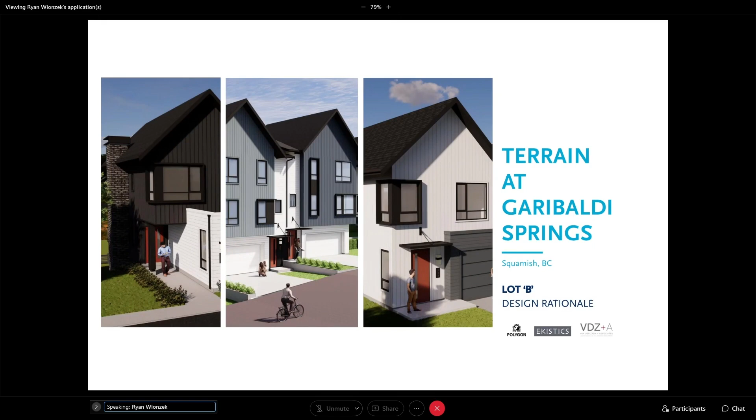So this is Garibaldi Springs Lot B, or what we're calling Terrain. This is the second phase of development at Garibaldi Springs. So a quick rundown of our vision: we are taking our cues from Scandinavian architecture as it relates to our styling and character.

We're looking to provide a number of housing options across the site of various sizes to create community that all could live at. We are looking to develop a continuous public and private multi-use pathway system that connects down from Dowad and across through all of these sites and into the adjacent park areas. And we're looking to incorporate a number of sustainable measures across the development, including meeting Step Code 4, as Kevin said, and providing EV charging to all homes.

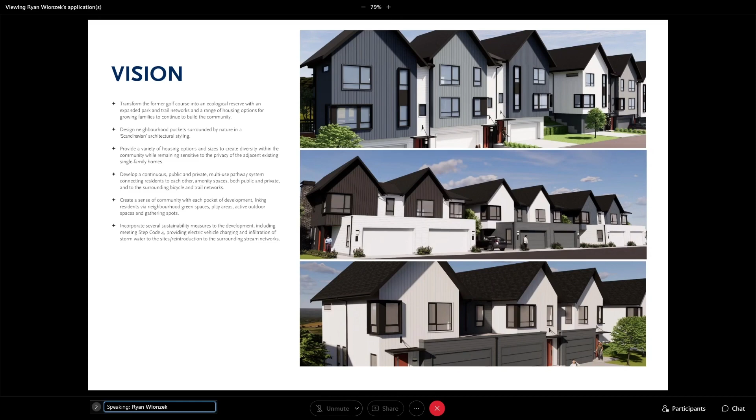As I noted, the architectural influences come from the surrounding areas, but we put a contemporary twist on it. We're taking our cues from Scandinavian architecture, focusing on simple, clean lines, distinct gable forms paired with contemporary window forms and groupings, really giving the development a unique character. Fiber cement vertical siding, along with a crisp, clean color palette, horizontal plank and select brick elements, metal shadow boxes and canopies help the exciting architectural character that Squamish is known for.

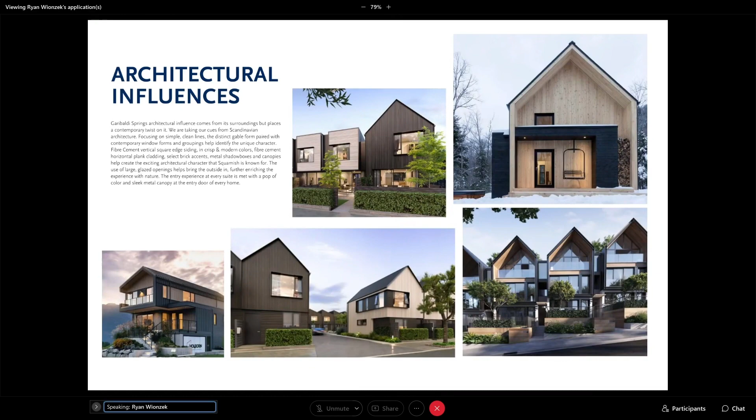The use of large glazed openings helps bring the outside in, which is a key feature of the Squamish area. As you can see here, here's some of the materials and ideas for detailing that we've taken into consideration.

So here is the proposed color palette. We've got 3 color schemes that we've applied across the site. Our vertical siding tends to be applied to our key massing elements, so the gable forms. Our horizontal siding has been applied to the base of the building, grounding the buildings. Again, the color schemes are quite crisp and clean, which we're quite excited about.

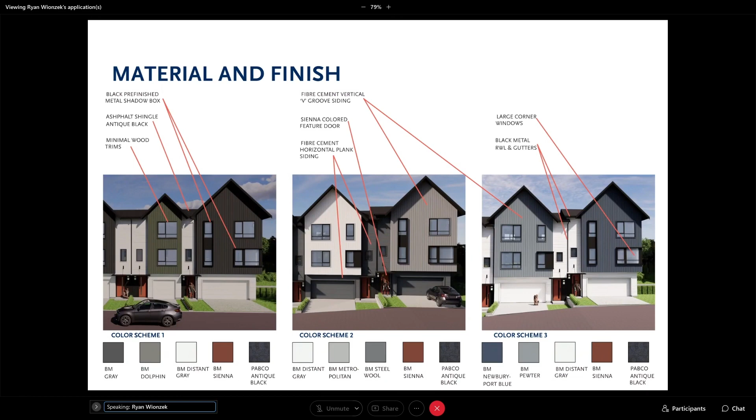A high-level look at the site plan here. As Kevin noted, we've got 127 homes of varying size across the site, including affordable homes and lock-offs. We have 10 affordable homes, 17 lock-offs have been provided. We have approximately a 40-meter grade change from top to bottom.

So we've oriented the buildings to follow the natural topography, and we're using the building foundations in combination with retaining walls to make up that grade change. A large outdoor amenity space has been provided at the lower end of the site, which Travis will get into shortly.

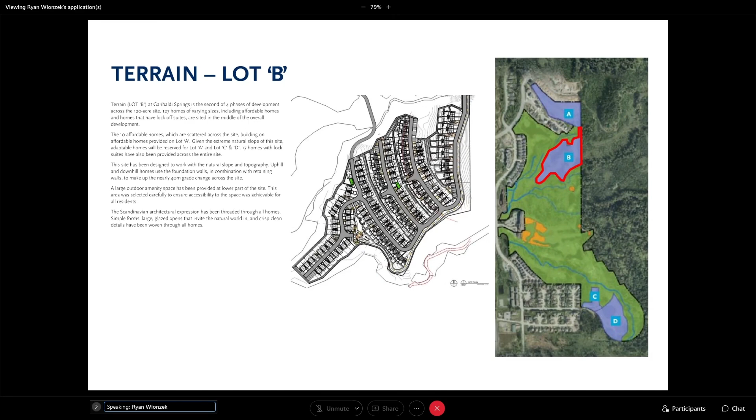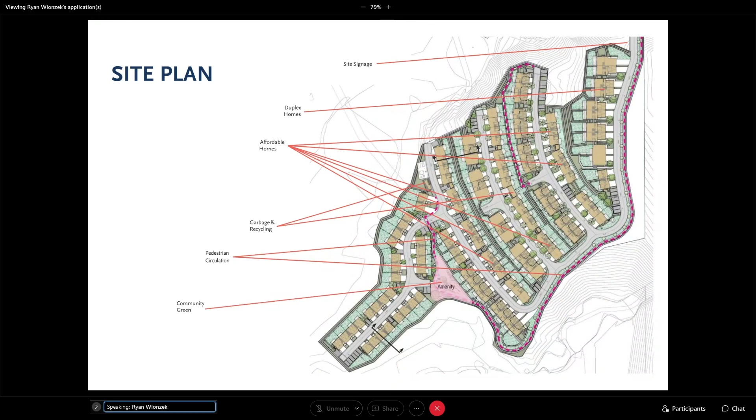Again, just a high-level look at the site plan here. At the top of the site, we've got our grouping of duplex homes. The affordable homes have been distributed across the site, so they're not all grouped in one area. As noted by Jesse, we have 2 garbage and recycling holding areas across the site for access for the residents, and then our amenity space on the lower bench of the site.

I'll hand it over to Travis quickly to go through the landscape elements. Thank you, Ryan. Ryan already gave a comprehensive overview of the site, so I'll focus on a few of the elements that impact the landscape experience.

One major element is the walking path that was mentioned. That's dashed in pink on this plan, and it reaches down from the north, down the south, and up through the center of the amenity space. As well, we also have a walking path linking to the lock-off units, and that's the one in the center of the project there behind those townhomes.

Secondly, significant time was spent honing the terracing of the site, so that, as Ryan mentioned, we are following that natural topography and creating yards with pleasant outdoor spaces across the hill slope area. So while much of the character of the site comes from the architecture and the surrounding natural spaces, the landscape seeks to accentuate access to nature and local vernacular with the use of site-quarried stone when possible.

The images below in this slide show stacked stone walls that will terrace the site, as well as attractive privacy and yard fencing. Where possible, transparent fencing will help the rear yards connect to the surrounding natural lands. This is particularly notable along the south and southwest rear yards on this project, that sort of south peninsula-looking element where we're really directly adjacent to a lot of forested area.

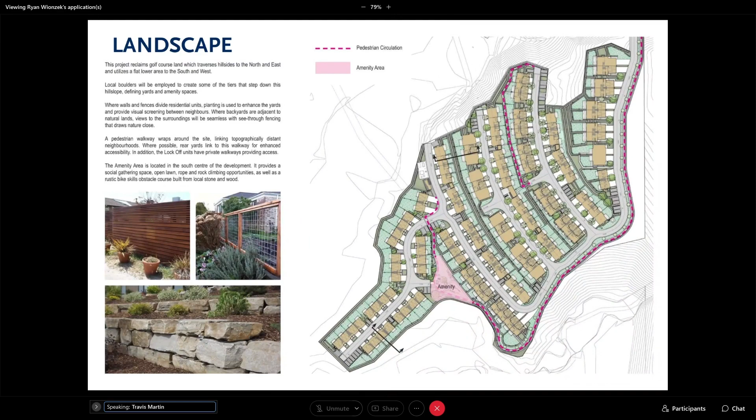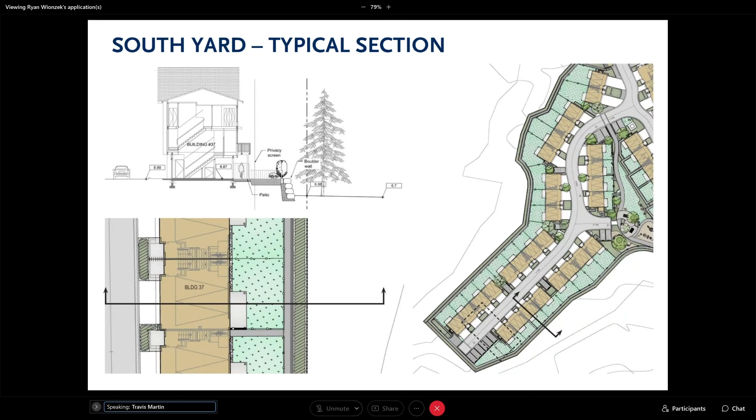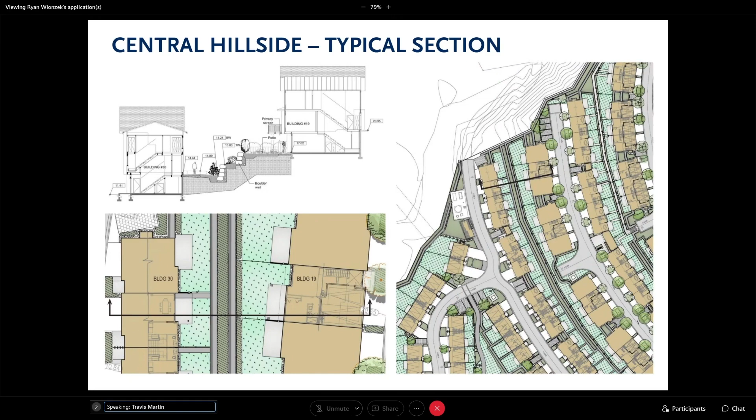And then here's one of our more complex sections along the hillside, which maximizes yard space, provides a vegetated screen on the top yard to help reduce overlook, and then provides vegetation along the wall bases to provide year-round green views for that lower unit looking into the backyard. And we've got generous sized patios and lawn space to the back.

Looking into the planting, as noted, the site comes with a few challenges: being fire smart and being bear aware. Our design seeks to provide strong evergreen presence while respecting fire smart guidelines, which minimize conifers since they're more flammable. We're also being bear aware while using interesting native species not always used in development, as well as a mix of pollinators and color. For trees, we're mostly deciduous, mostly smaller flowering and ornamental trees, plus some shade trees in the mix.

Finally, on this lower amenity area, it's well linked to the perimeter walking path. There's a lower nature area to the southeast, so you can look beyond, and it's a longer space, which helps make it feel larger than it actually is, but it's a good size. We focused on the center with a nice seating area with a few picnic tables and a gathering space. Beyond that, there's an open lawn, some natural play including a large boulder and ropes. We're hoping to get those boulders from the site if possible, as well as a boulder log obstacle course to the right and a seating circle to the south.

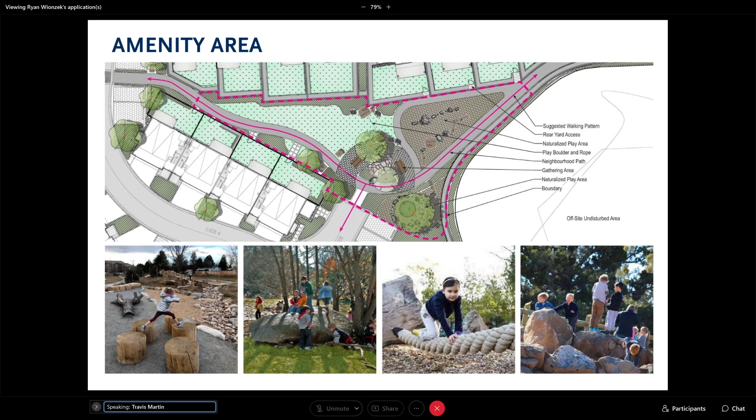Okay, thank you. Getting into the character and the unit types more specifically, what you're seeing here are A homes, or the affordable homes. As Kevin noted, we have 10 of these homes across the site: 6 three-bedrooms and 4 two-bedrooms, approximately 1,000 square feet. Each home has 2 parking stalls, one in and one either on the driveway apron or a remote location nearby. These homes are designated as affordable without sparing any detailing or expense, so they look and have been designed to look like all the other units.

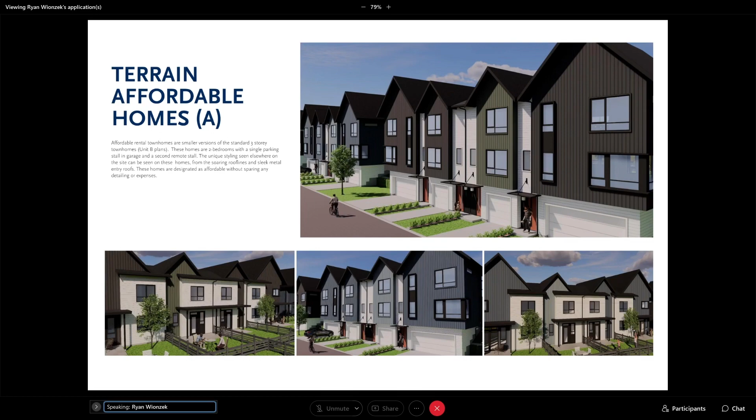The B homes are our most common unit across the site. We have 36 uphill versions of these homes and 35 three-story versions down on the lower bench. The approximate size of these homes is approximately 1,500 square feet, typically 3-bedroom homes.

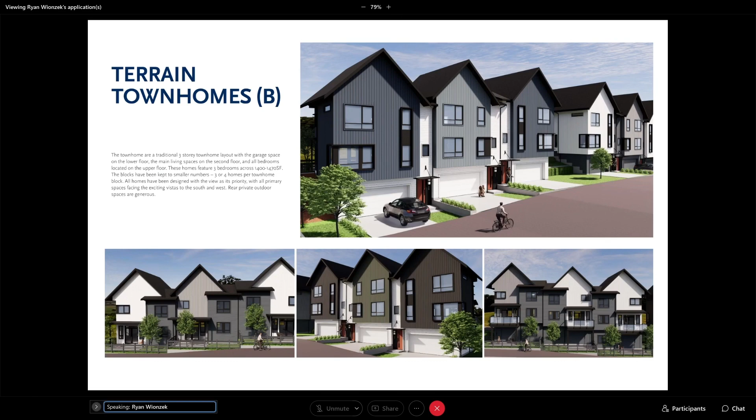Our C homes are downhill homes, and we have 38 of these, 19 of which have lock-off suites on the lower level. The non-lock-off would be a 4-bedroom, 3-level home. The lock-off versions have a 1-bedroom suite on the lower level, and the main suite is a 3-bedroom, 2-level home, approximately 2,150 square feet. Again, these lock-off homes have been scattered across the site at various locations.

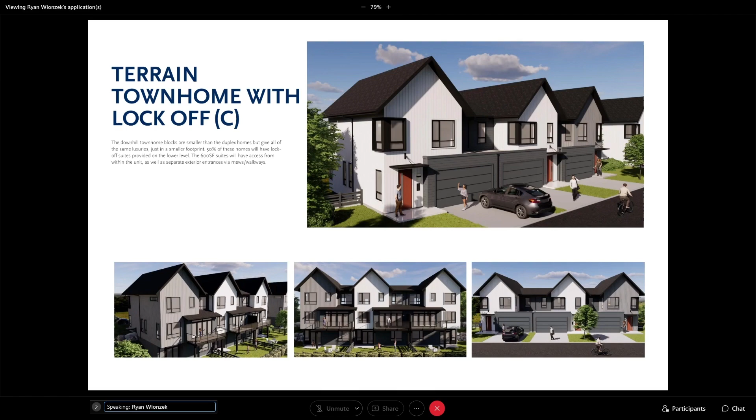The D homes are our duplex homes that you will see when you enter the site, coming down from Dowd and through the Highline property. We have 8 of these homes on the site at approximately 2,600 square feet, 3 bedrooms plus a large walkout basement.

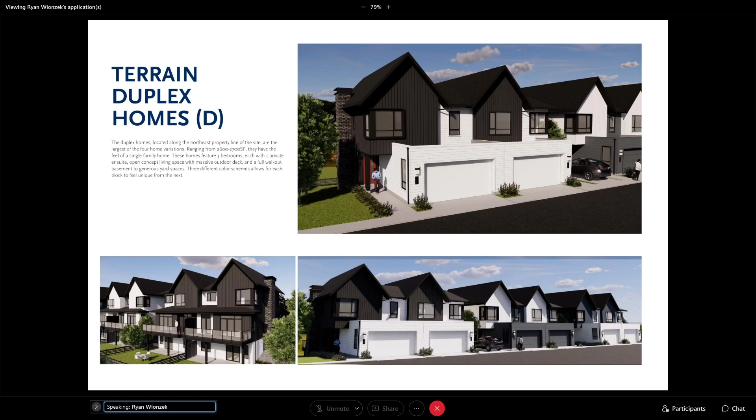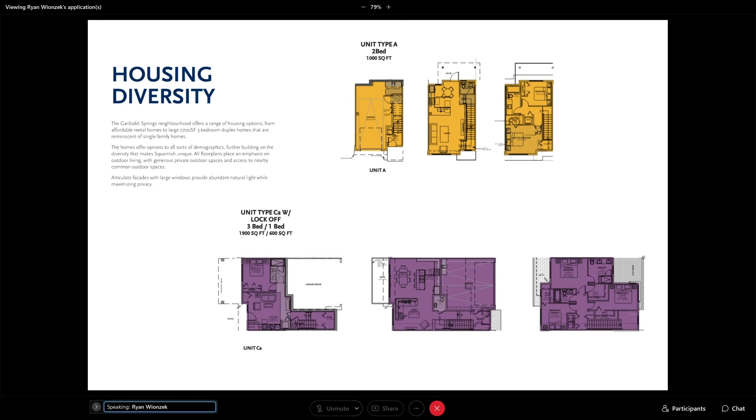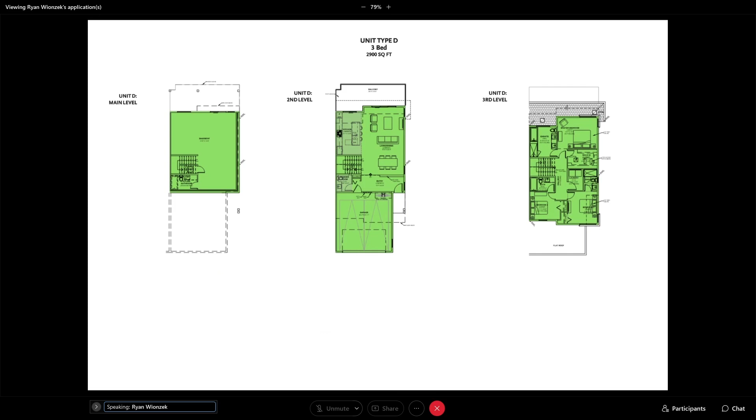And our duplex home, again, that you'll see at the beginning of the site. Each bedroom has its own ensuite, so quite a nice home, almost single family home-ish. Just another version of that plan.

Just a quick site section to demonstrate how we're working with the natural grades across the site, and to show the challenges we had while grading the site, it being quite a steep site.

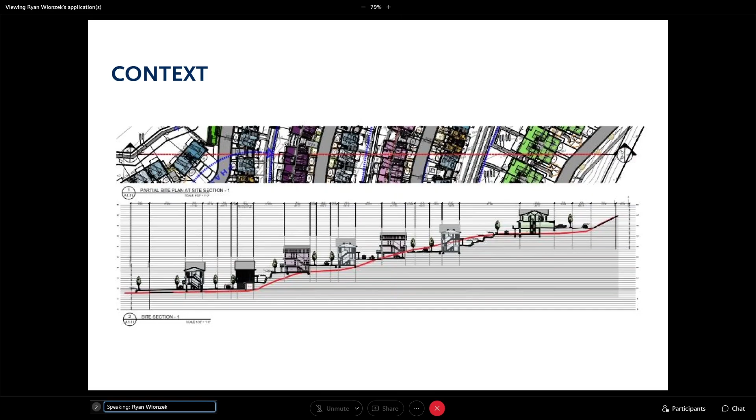And then again, just quickly touching on the sustainability items we're looking at on this site. As Kevin noted, we are going to be step code 4, so that is a first for Polygon. We're already looking at things that will need to be done in order to meet that. Again, like Highline, we will be providing electric vehicle charging capabilities to all homes, and everything will be all electric, so no gas or natural gas appliances.

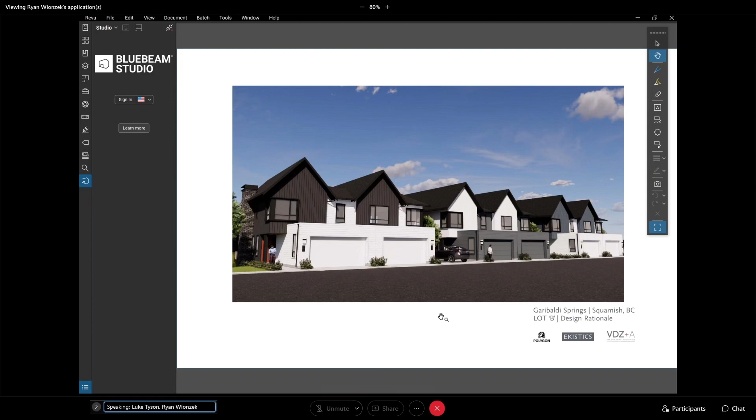Okay, sorry. There's a pedestrian connectivity down on the southwest where there seems to be a cursor... oh, it's gone now. No, sorry Ryan, not there.

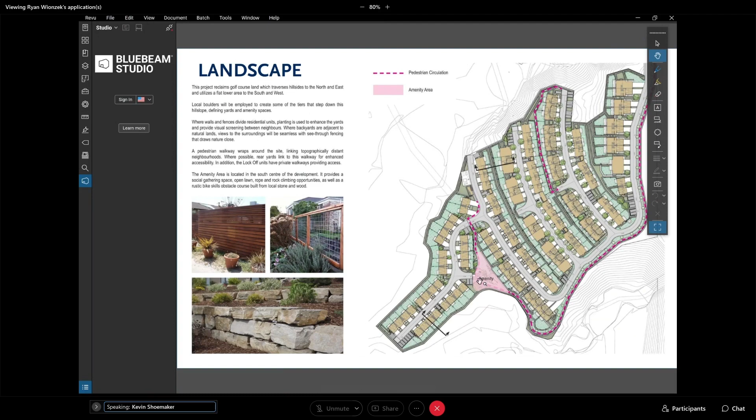So there's a pedestrian connectivity from there that goes across and down to Tantalus Road, or towards where the old golf course used to be. It's just really hard to see, and there's no context included on this, so it's really hard for me to understand where this is connecting to. Is there not a context plan one back, Ryan?

I thought we had a context plan in there. So the path goes down all the way to C and D, which are the two townhome sites at the bottom on Newport Ridge Drive. It also goes over to the orange area where Norman Rudy's is and the hotel. Then it goes up to Dowad, either straight up beside Lot A or over sort of northwest towards the lower part of Dowad.

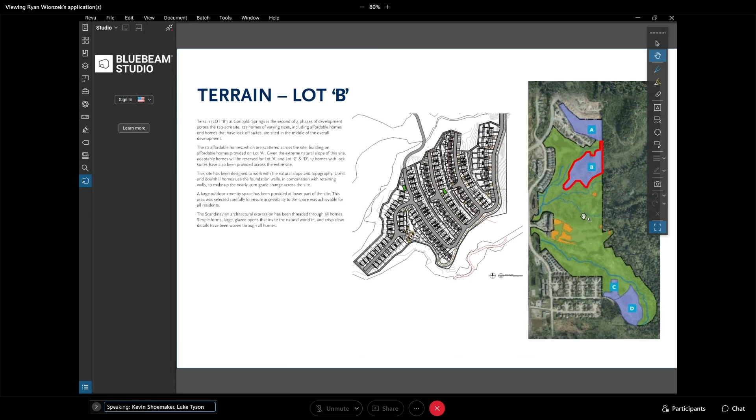And is there any pedestrian, like mid-block pedestrian connectivity within your site, such as where the T stubs are, or connecting up through the middle? Not currently, no.

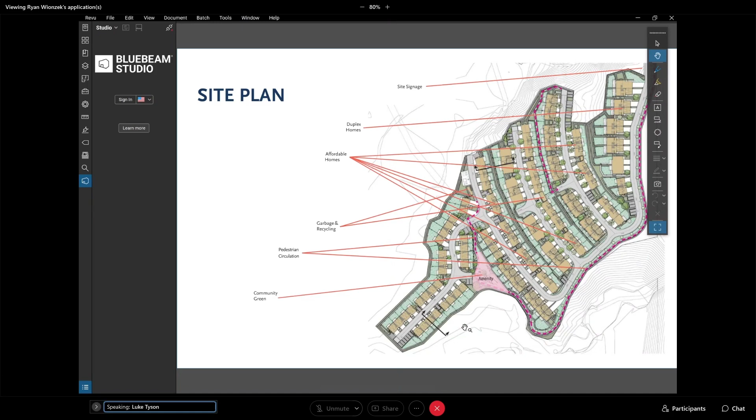Okay, sorry, I've taken quite a bit of time there, so I'll leave it at that for now, and I'll circle around if I have any more questions. But thank you very much. Thanks, Luke. Julian. Thanks, guys.

Could you point me to where the snow dump storage is on the plan? We haven't considered that right now.

Sorry, I hate to keep jumping in like this, I don't mean to. Civil's not represented in this meeting, and they are aware of that. We've had to accommodate on the sites. So I do know that Cormac, the civil engineer, has thought about this in their planning of the roads.

Okay, and is that also tied in with the lighting, street lighting, that sort of stuff? Yeah. Okay, so that's information that's going to come as part of the application. Correct. Okay, did you guys do any CPTED analysis? There hasn't been that yet. Okay.

I noticed on a couple of your very nice looking model shots, some white elevations. Are any of those facing north? It looks like you've got white Hardie panel or something. Is any of that facing north? There will be some parts of each building, depending on the color scheme, that will have white siding facing north. Yes.